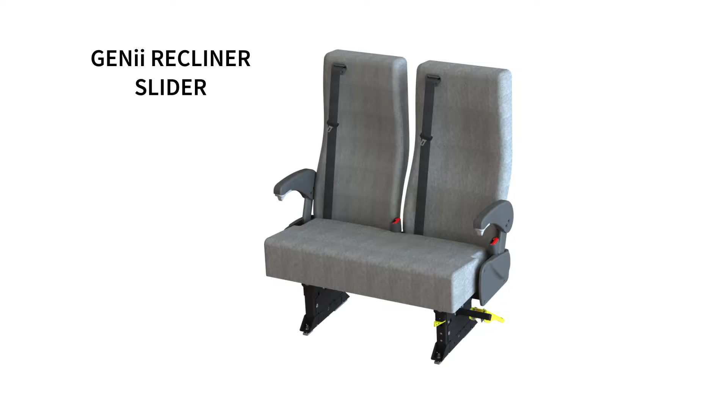American Seating introduces the Generation 2 Recliner Slider. In this video, we will show you how to adjust the pedestals and the plunger locking mechanism.

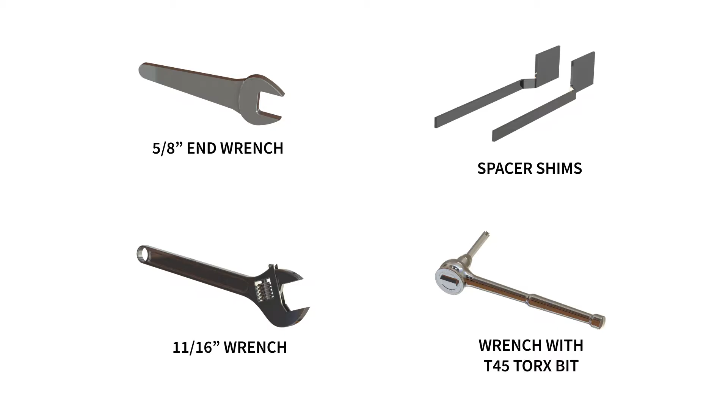The following tools are required for installation: a wrench with a T45 Torx bit, a 5/8 inch end wrench, and an 11/16 inch end wrench.

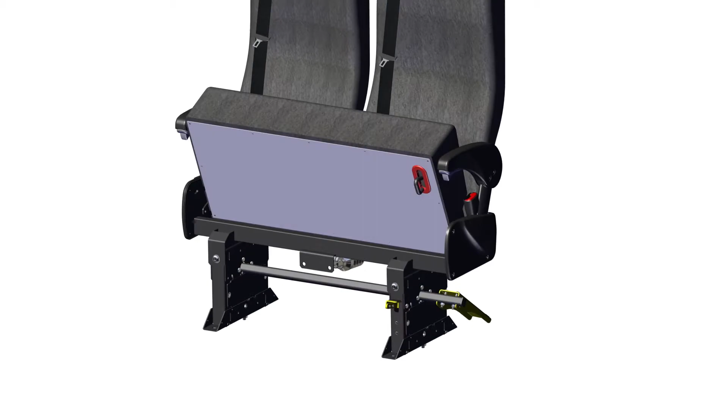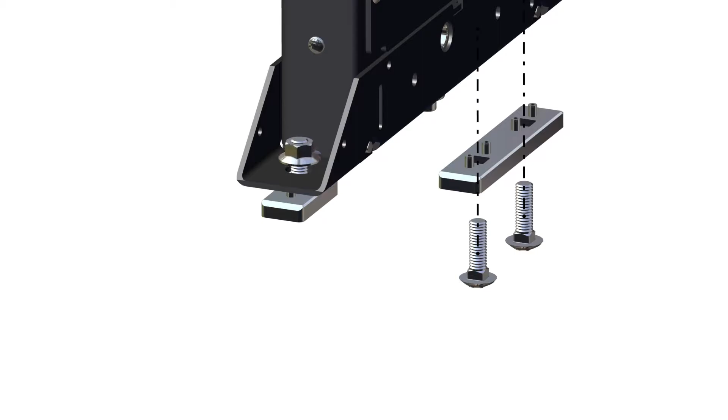Pedestal spacing adjustment. Begin by lifting the seat and locating the track blocks. Track blocks are shipped loose and unassembled. Attach track blocks to pedestals, placing the short blocks in front and the longer blocks on the rear. Slightly tighten the nuts with your hand, but do not over-tighten. Repeat on the opposite side.

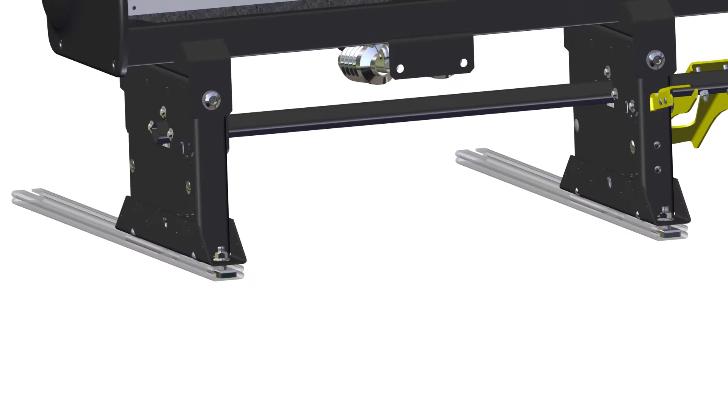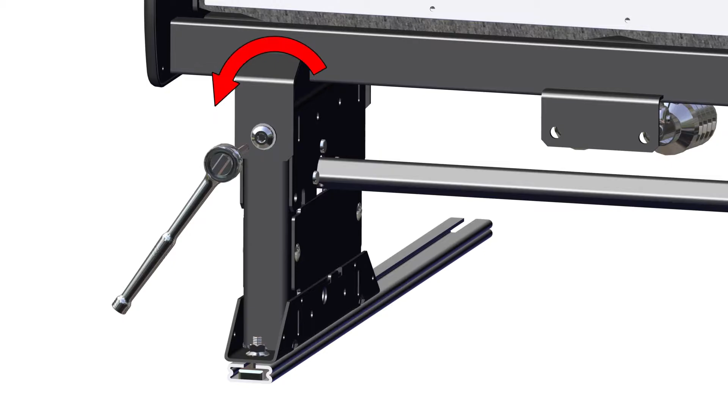Pedestals are preset to center-to-center track spacing based on the builder's supplied information. If further adjustment is required, follow these steps: loosen the two wall side pedestal bolts using a wrench with a T45 Torx bit.

Adjust the pedestal to center of track by sliding back and forth as shown. If more adjustment is required, loosen the aisle side pedestal bolts.

Rotate the wrench counterclockwise to loosen the front and back bolts. Adjust the pedestal to center of track as needed. When spacing is correctly adjusted, the seat should slide with minimal binding.

Once adjustment is complete, retighten all pedestal bolts. Tighten to 40 foot-pound torque, and if required, mark the bolt heads with torque seal per customer specification.

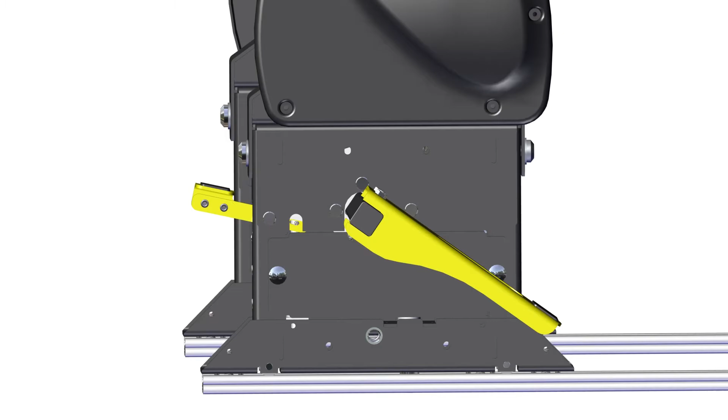Complete the seat mounting procedure using provided shims placed along the sides of the front and rear track blocks to center and eliminate binding with the sidewalls of the track, while tightening to 15 to 20 foot-pound torque.

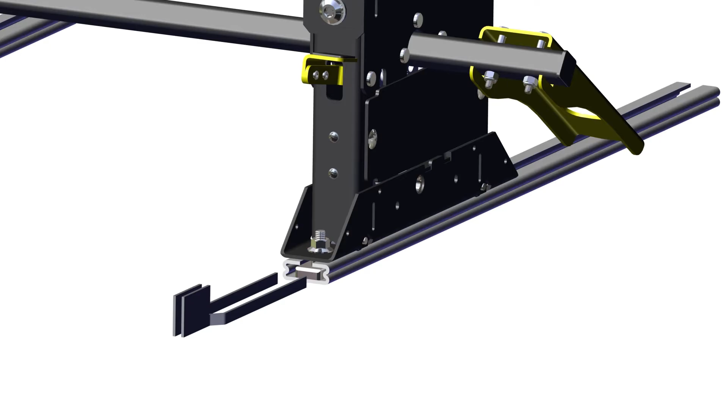Remove shims after tightening all the bolts. This completes the pedestal spacing adjustment.

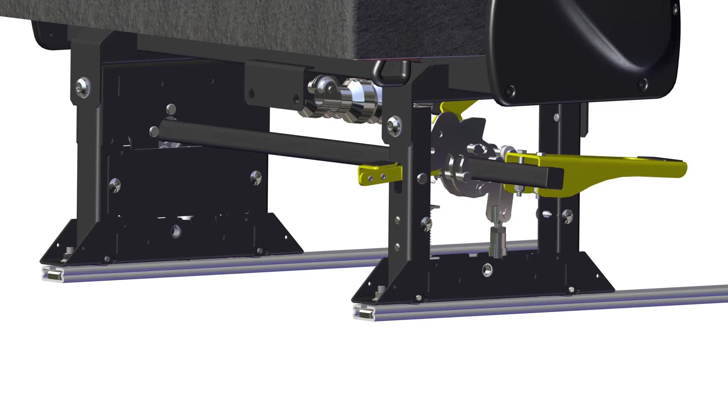Pedestal locking plunger adjustment. Slide the pedestal until both plungers locate the existing holes in the track. Once there, try locking by pressing the lock lever down. If too easy or too hard, make plunger adjustments as required.

If the pedestal is too loose or too tight, you can adjust as follows. Unlock the pedestal to expose the jam nut on the plunger by pulling up the pedal. First, loosen the jam nut from the plunger using a 5/8 inch end wrench for the plunger and an 11/16 inch end wrench for the jam nut. This allows space to move the plunger in either direction, up or down.

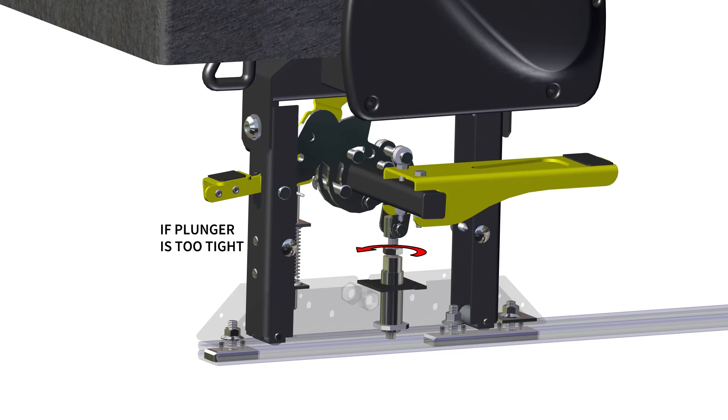If the plunger is too tight, looking from the top, turn the plunger counterclockwise to raise the plunger and decrease the locking force.

If the plunger is too loose and doesn't lock into place, turn the plunger clockwise to extend the plunger down and increase the locking force.

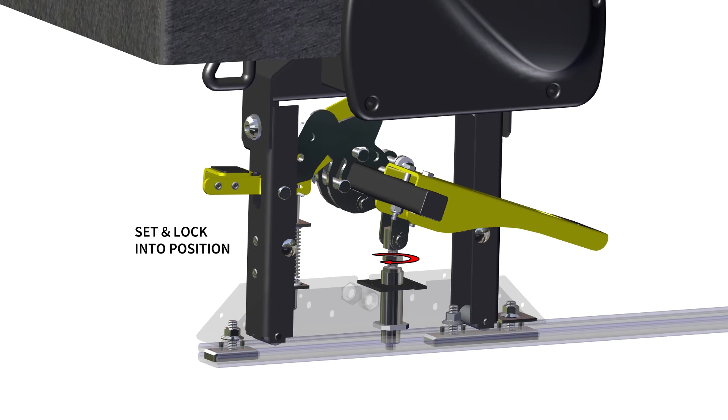Lock the pedestal into place to check the tightness. Once adjusted, unlock the pedestal and retighten the jam nut to the plunger without turning the plunger, so you don't lose your newly adjusted location. Retighten the jam nut using the 11/16 inch wrench and hold the plunger in position using a 5/8 inch end wrench.

If needed, this same adjustment can be done for both the aisle side pedestal and the wall side pedestal.

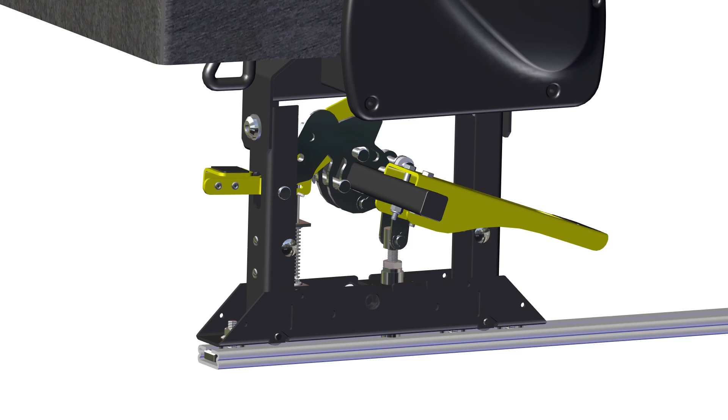This concludes the Installation Adjustments Guide of the Generation 2 Recliner Slider. American Seating.